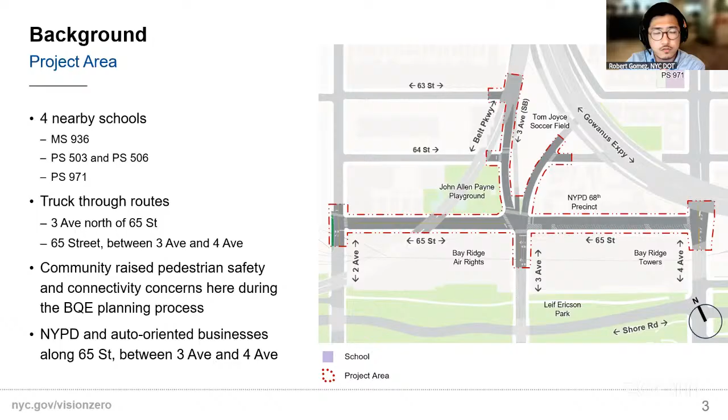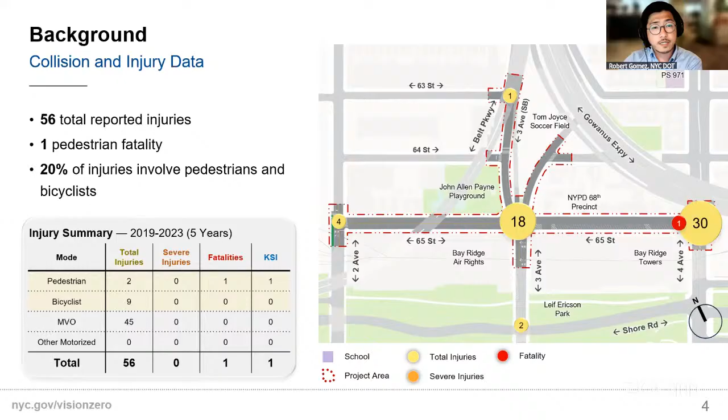Between 2019 and 2023, there were 56 reported injuries in the project area, including one pedestrian fatality. Around 20% of those injured were either pedestrians or bicyclists. This data reflects the challenges that we observed firsthand: long crossings, fast turns, and poor visibility, all contributing to unsafe conditions, especially for kids and families walking in this area.

So now that we've reviewed the crash data, let's take a closer look at what the street actually looks like today and what specific conditions are contributing to the safety concerns in the area. Starting at the northwest corner of 3rd Avenue and 65th Street, we've observed wide sweeping turns, the kind that encourage drivers to move quickly through the intersection. This creates real risk for people crossing, especially since the crosswalk here is really long. When drivers don't yield properly, pedestrians are left exposed for longer than they should be.

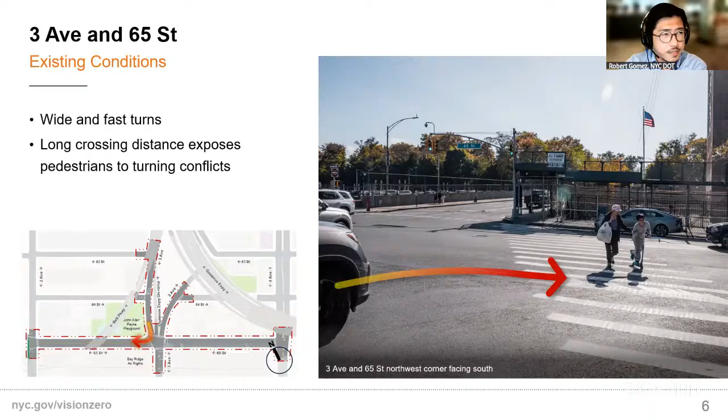The intersection is right off the Gowanus Expressway, and the design doesn't fully reflect the fact that this is already a residential area. But that's exactly the problem. This is a neighborhood with schools, parks, and people walking every day. The street should function like it, and right now it doesn't.

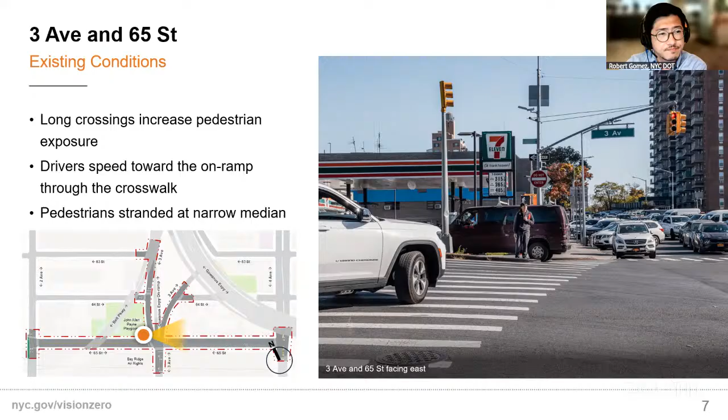Looking at the eastern leg of the intersection, illegal parking adds another layer of danger. When cars are parked close to the crosswalk, people walking are forced to step out into traffic just to be seen. Double parking also disrupts how vehicles turn or move through the intersection, making the whole space less predictable for everyone.

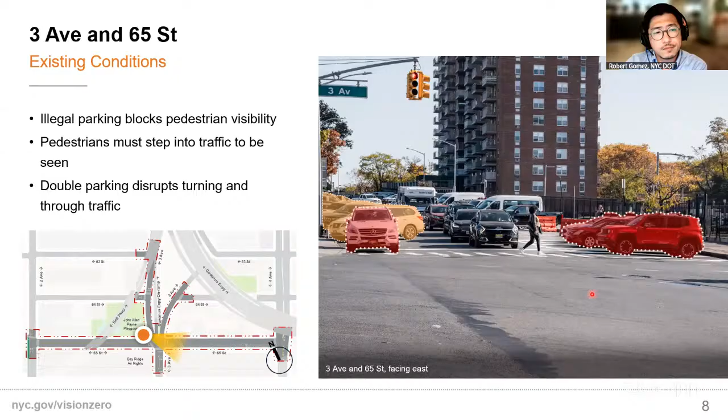Moving a bit further on 65th Street, the road becomes wide and unstructured. That leads to drivers weaving around each other, often trying to pass illegally. Double parking is common here too, which pushes traffic into the opposite lane and creates unnecessary risk, especially for people walking nearby.

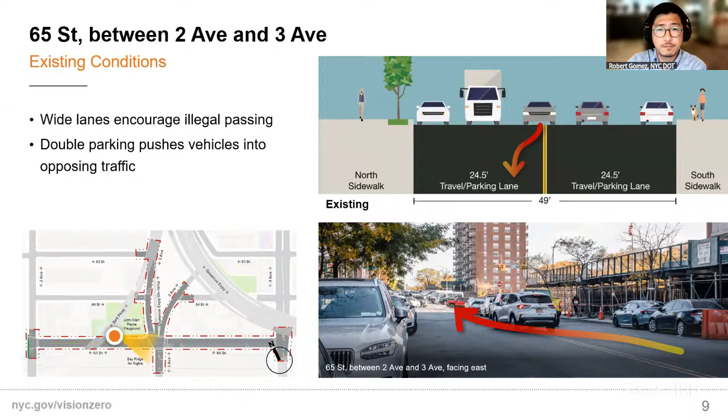North of that main intersection, we're seeing similar problems along 3rd Avenue heading southbound. Traffic is disorganized. There is no clear lane structure, and wide turn angles make driver behavior harder to predict. Visibility for pedestrians is limited, especially near parked vehicles.

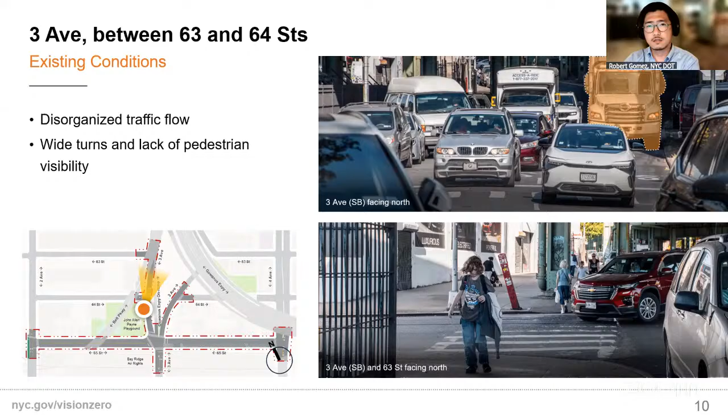At the intersection of 3rd Avenue and 64th Street, there's a missing pedestrian connection to the Tom Joyce soccer field. There's no clear or safe way to cross here, and limited cues for drivers to slow down or yield. This corner doesn't feel complete from a pedestrian's point of view.

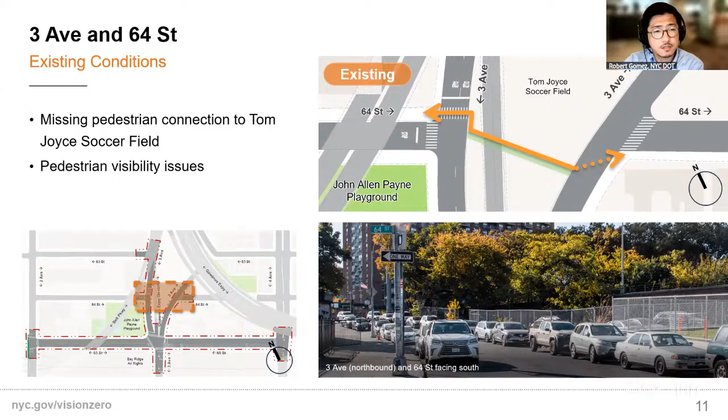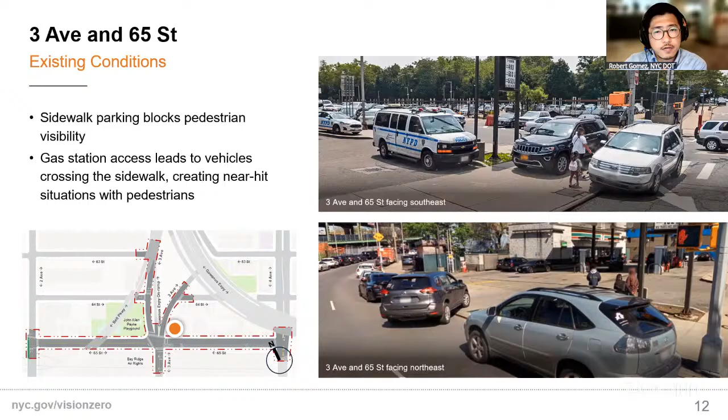Now that we've seen the challenges on the ground, let's walk through the proposed improvements. The design focuses on 3 main goals: shortening crossing distances, slowing down turns, and restoring visibility at corners. At the same time, we're making sure the street continues to function for vehicles and curbside needs. Importantly, there's no net loss in parking. Some spots are being shifted to better support visibility and safety, but the total number remains the same.

At the main intersection of 3rd Avenue and 65th Street, we're proposing intersection-wide safety upgrades designed to make it safer and more predictable for everyone. We'll be adding painted curb extensions at all 4 corners. These help shorten the distance for pedestrians crossing the street, while also tightening the turns for drivers, which slows down vehicle speeds. We're also removing 1 southbound travel lane between 64th and 65th Street.

This section carries relatively low traffic volumes, and our traffic analysis and modeling showed that removing the extra lane will not impact traffic flow, but it will help calm speeds and make the intersection feel more manageable. These types of changes are never made lightly. They're always based on data and engineering review.

On 65th Street between 3rd and 2nd Avenues, we're widening the parking lanes. That gives more breathing room between parked and moving vehicles and helps reduce mid-block conflicts. Lastly, we're shifting the bus stop slightly to the north to open up visibility and improve safety at the corner. Altogether, these changes begin to shift the character of the street from something that feels wide, fast, and highway-like to something that fits the neighborhood — calmer, safer, and more welcoming for people walking.

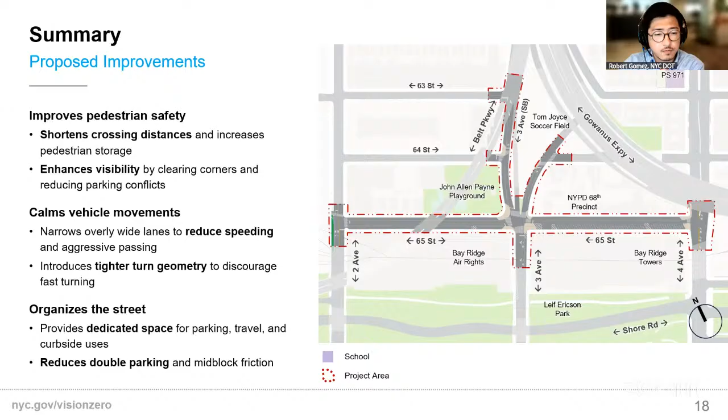I think the committee will have questions and comments here. Maybe it might be helpful to just go through each of those one by one, like with this zoomed in one. Maybe starting with the 65th Street one at 3rd Avenue, the first one that you showed, and we just walk through each of those. I'm sure there'll be more specific comments on each of them.

I had a question on this one specifically, which is on the curb extension, especially on the lower right-hand side. Why not extend the curb painting across the entire stripe lane? Why end about halfway there? Yeah, so because it's by a driveway, we needed to maintain a few feet from the curb extension.

Alina, do you want to add more to that? Sure. So the side on Third Avenue, we cannot mark it with paint because this is where the elevated structure starts.

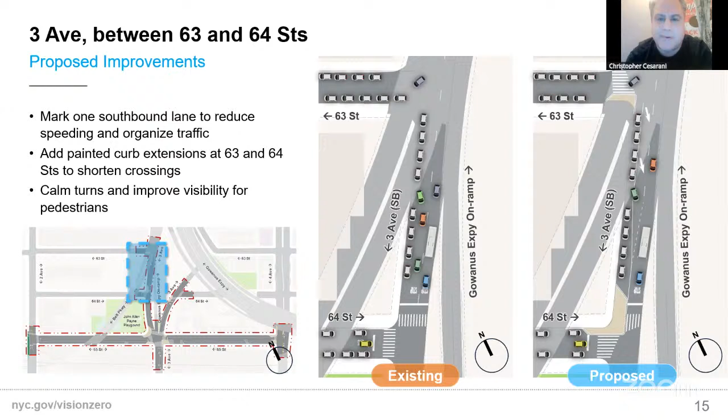I was just going to say that everything looks really great, because I know that on either side of the sports field and alongside that park, the traffic needs to be slowed down for sure. And widening out those curbs, extending them like that - you have little kids crossing the street and the cars can't see them and they whip around. It's all good, but thank you for that, Josephina. It wasn't necessarily following the other piece with the parking lot.

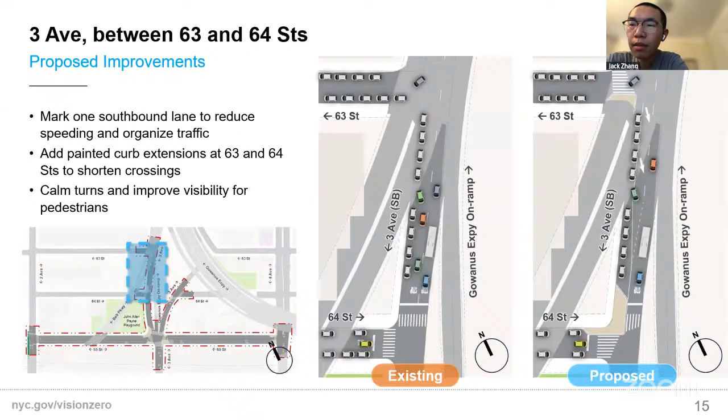Would you mind going to the next slide, Robbie? Yeah, sure. So here's the connection to the Tom Joyce soccer field. We're adding a stop sign plus curb extension with a marked crosswalk.

Any reason why there wouldn't be a crosswalk on the south side of the left intersection, right about there, next to the playground? So it's because this is a one-way eastbound street. We think it would be safer to have the crosswalk on the north leg instead of the south leg, just for visibility too - there will be no turning conflict there. Essentially, cars will be turning from here, so if they cross from this side, they wouldn't have that turning conflict.

Are you removing the stop sign there? No, the stop sign would stay. It's already there. The crosswalk is the closest to that pedestrian desire line to cross between two sides of Third Ave.

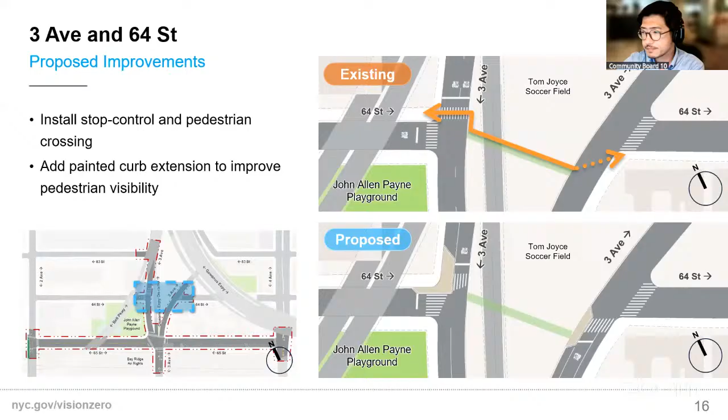Put stop signs on both sides? Yes, put a stop sign there where you have your red pointer, and there's already an existing stop sign - stop signs recently installed. Any other questions? I don't see any hands.

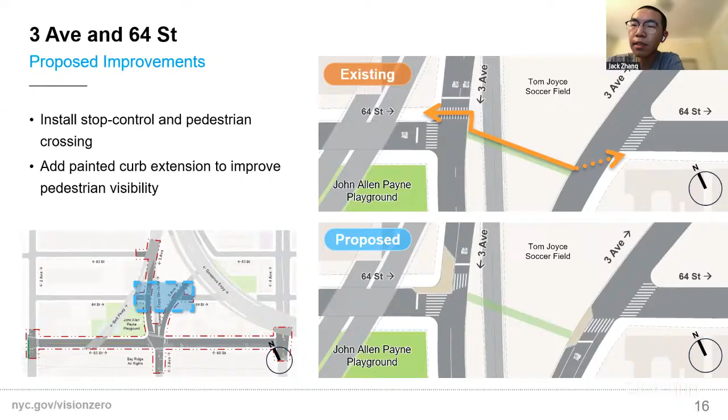All right, Robbie, can you go to the next slide please? This is on the application. So other than this kind of curb cut, what other improvement possibilities would you have here? So this is a very challenging issue for us to fix, and we're still looking at possibilities.

Basically, we need to very carefully analyze possible gas station movements to understand their operational needs. We need to talk to the gas station owners. Ideally, we provide just enough space for the vehicles to get in and out, narrow the curb cuts that are not necessary, and narrow the ones that are extra wide, just to control the vehicle movements in and out more, and to prevent illegal sidewalk driving and parking to the maximum extent we can.

So we are now testing these back of sidewalk treatments that you have on the photographs. We also have a limited number of crash tested bollards. If these prove to be suitable here, we will proceed with the installation, but we're too early in the process. So these are just potential options that we have.

This is a relatively new pilot program at DOT, and we are very happy to be leading it. Essentially, we try to limit and redesign dangerous curb cuts next to schools or at locations where a lot of students are walking.

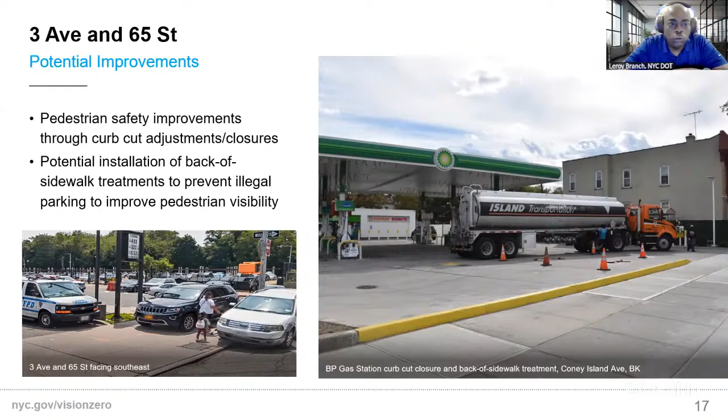And are you also putting in a bike lane there, or no bike lane? No, this is specifically a pedestrian safety improvement project. There are no bike lanes proposed here. Okay, all right, thank you for clearing that up for me. Thank you.

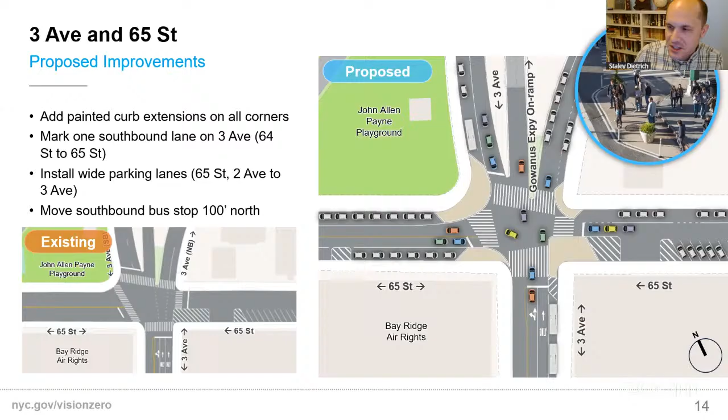Staley? So just a couple of thoughts on this same slide. First of all, when we're talking about that 7-Eleven and gas station, personally I'm very familiar with that corner. I don't think they need entrances on both Third Avenue and 65th Street, for what it's worth. I think that actually causes a lot of problems because it encourages drivers to cut through that parking lot to get around the traffic light. So I don't know which one's more important to the owners, but I certainly don't think they need both sides open.

The other bigger concern I have about this intersection is that you have a huge problem with vehicles parking on the sidewalk on both the north and south side of 65th Street. Those vehicles, let's face it, are pretty much exclusively either NYPD vehicles or personal vehicles belonging to police officers that work at the 68 precinct. So there's no enforcement of that, nobody's getting ticketed there.

I think one thing DOT could do to help mitigate that a little bit is maybe to consider putting in some street furniture, benches, things like that, to make it physically impossible to park on those sidewalks.

Along those same lines, I'm concerned at 65th and 3rd with the curb extension you put in. I'm glad you said you're putting some hardening in there, but unless that hardening is pretty tight, those police cars are just going to drive around those granite blocks, much like they do now. That corner is already marked no parking for daylighting, for safety reasons, because it's hard to see around that corner, yet it's completely full of police cars and police officers' personal vehicles at all times.

I'm not sure exactly what the solution is on that corner, but I think some sort of physical impediment to parking vehicles there is the only thing that's going to solve the problem at this intersection.

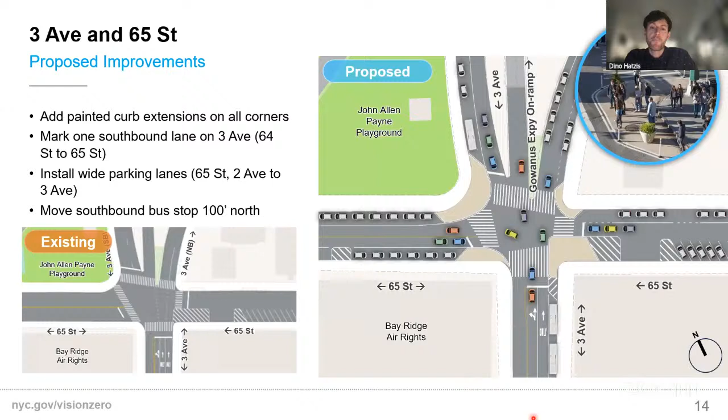When I travel up to Vermont a lot, my friends own a gas station in addition to other businesses in one complex. I think about how massive their gas station is. When they were having it built, it was recommended that they have two, an entrance and an exit, because when they're filling the pumps, that takes up a lot of space. That gas station, I sometimes wonder, it's so small. They have vehicles coming in for gas, but they also have vehicles coming in that may have a flat tire or other issues. You don't want somebody blocking the entrance when you need both to go in and out.

But the only thing I'm going to say is, when you do go there, make sure you're talking to the owner and not somebody who works there, because the owner is the one responsible for the cost of making changes or anything. Sometimes with these meetings, it happened not too long ago, they were talking to the workers rather than the owner of a company, and that became a big issue. So just make sure you have the people who own the gas station, not just the workers there.

We definitely do talk to the owners. I was actually a part of the one on Coney Island Avenue, and we actually called BP, the main office, and spoke to them directly. It has to be a collaboration between City DOT, the gas station owners, Department of Buildings. So it's a collaboration, and it's going to take some time to get done. It's not something that happens overnight.

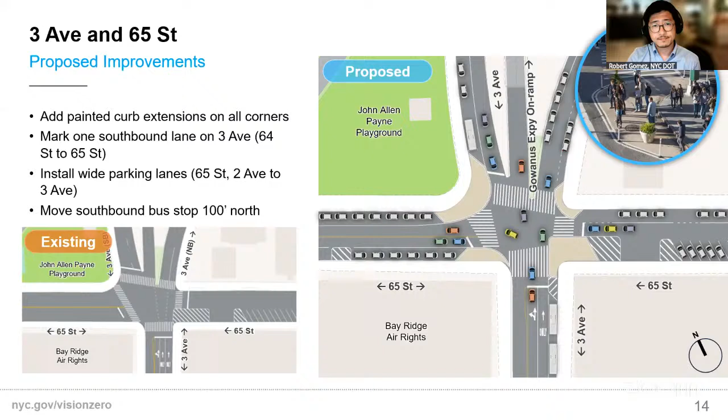Thank you. I guess really the two suggestions we've had during this call, and we can send it to you guys as well, is about the hardened sections and any of the painted ones, LPI. And of course, it's good that there's no parking being reduced, and the actual painted lanes are not into the travel lanes, which I guess we confirmed earlier today. But those two suggestions are the main ones, and also some kind of street furniture on the sidewalks, like benches, something to make it difficult to park on the sidewalks themselves would be wonderful.

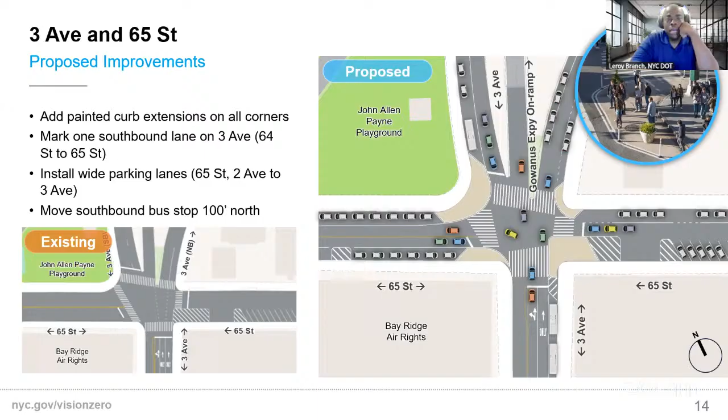Again, if we can get a partner, that would help immensely, and we can harden it with furniture and planters and different things of that nature, so they won't be able to park in there. Because remember, I said before, the reason why we can't do as much as you would like us to do is because sanitation would have to clean it. But if you had a partner, the partner would be cleaning it, so then we can harden it to the point where no one can get in there.

So the partner also maintains that space, including planters and anything we put in there. Is there a BID in the area? No, not there.

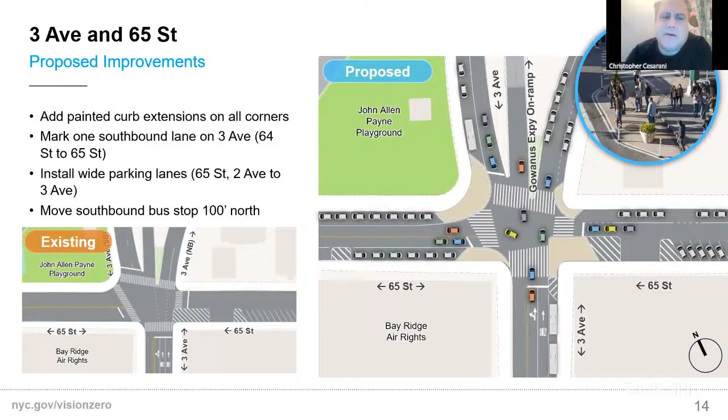They tried at one point, but it was not successful, unfortunately. But I will reach out to the towers management people, and I'll take a look at our community list nearby to see if there's interest.

Air rights are the same, the air rights is the same as the towers.

I just wanted to flag in terms of the street furniture request on the sidewalks next to the police precinct. I know we receive a lot of requests for street furniture, and the street furniture planning team typically prioritizes placing it where there is demand, where seniors need space to rest, or where there's an entrance to a school or playground. With the precinct, I suspect there won't be as much demand, so we can forward them this request. I do not know that they will consider this a priority location, because basically they're not using street furniture simply to block parking, but street furniture needs to be also used by people.

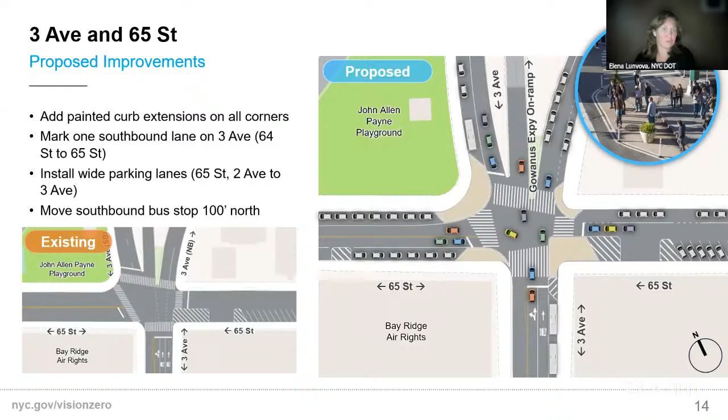We'll get some suggestions for street furniture, and ask about both sides of the street along these lines.

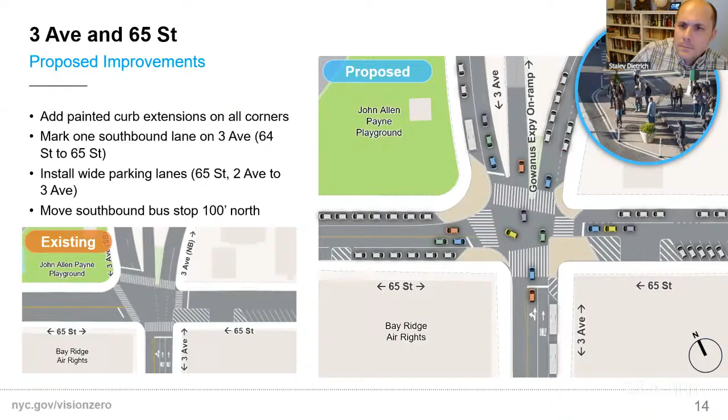Who typically makes the request for street furniture or bike parking, is it the property adjacent to the sidewalk, or how does that work? No, anyone can make a request for street furniture anywhere in the city of New York. You can just go on our website and make the request. Not to say the request is going to happen, but you can make a request for a particular street furniture.

It's also worth asking the residents of the towers there if they would like additional street furniture, because I see none in the Google Maps, especially on the south side of 65th.

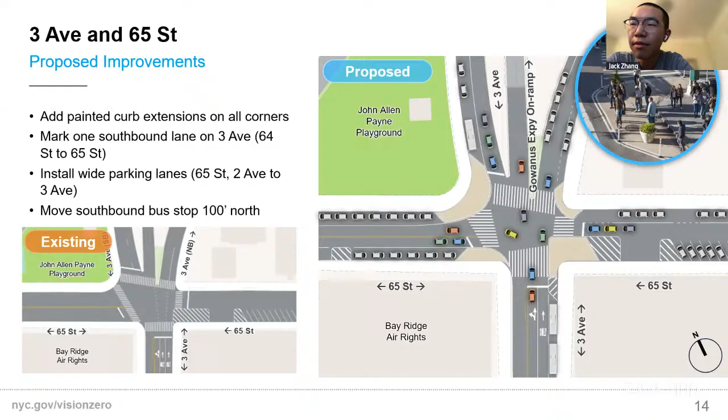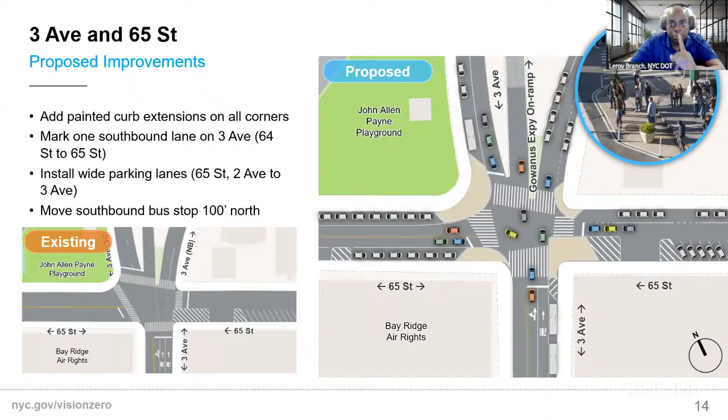Right, but again, as Elena was saying, we would put street furniture where it would be utilized. Let me make this last point: a lot of times we put up benches, and then six months later they're telling us to take them out because of people who sleep on them, bring garbage, hang out, make noise, and then they say they don't want it anymore. So we have to take that into consideration as well.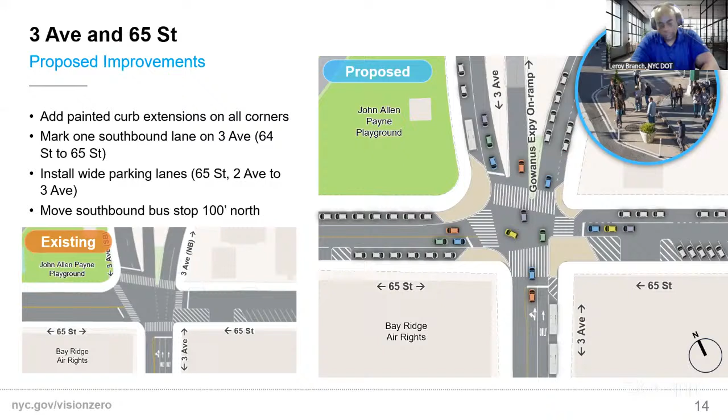Any other comments or questions? I have a question, but it's more for Josephine. At this precinct, is it just this precinct, or do they have another division of the police department there also? They have ESU there as well. I think that disrupting their parking might be an issue. We'll speak to them.

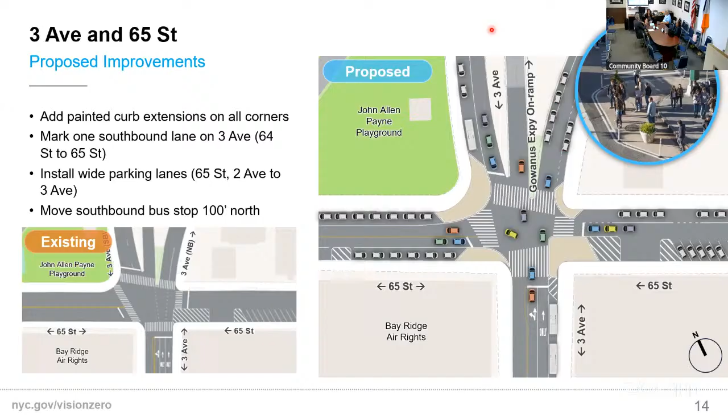All right, that's it. Thank you so much, everyone. Motion to adjourn. Have a good night. Before we adjourn, I want to bring up something on new business. Okay, Sandy's here, he has something quick he wants to bring up, nothing to do with this project. Okay, thank you, bye-bye, thank you so much, take care, Elena. Thanks, take care, bye.

I wanted the Traffic and Transportation Committee to find out what the process would be in getting a stop sign on all four corners of an intersection on 77th Street and 10th Avenue. Because I live around there, I see multiple accidents, and it's a bad corner. I don't know if the study done on intersections looked at that corner, but especially during the morning and afternoon hours when the school is open, there are many accidents there.

So I'd like to look into that. There are schools on 75th Street and Fort Hamilton Parkway, McKinley's by there, but there are numerous accidents there.

People are always in a rush. I know there was a four-way stop sign put on 78th Street and 10th Avenue, but 77th is equally bad. I know a lot of 10th Avenue locations have had requests, not all of them, but we'll definitely look into it. I'll email you tomorrow on that, we could see what the latest is.